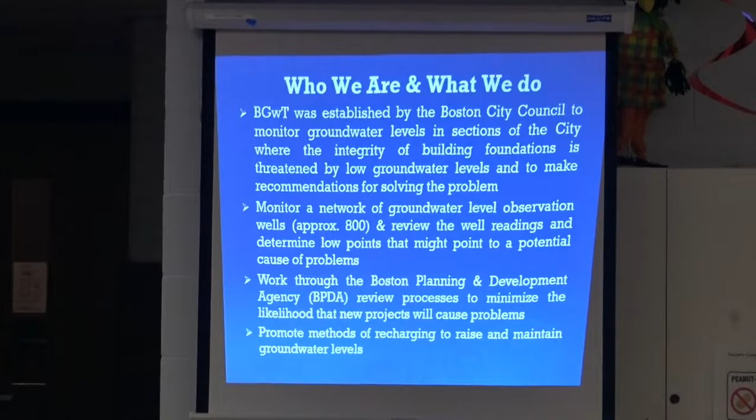So what do we do? Well, we were established by the Boston City Council in 1986. And our main purpose is to monitor groundwater levels in the city where there are wood piling supported buildings, and make sure that the groundwater levels remain above the tops of those pilings. If the groundwater levels drop, the pilings become exposed to air, and it's a race against time to find out why they dropped and bring the levels back up. If they're down for an extended period of time, for years, they rot. I'll show you some pictures. The building starts to settle and eventually fail.

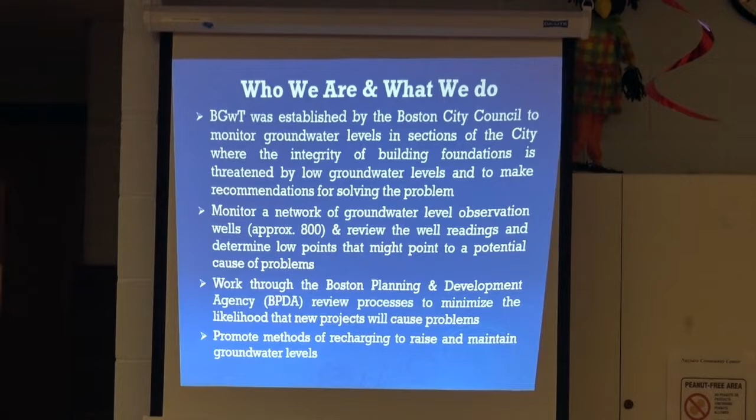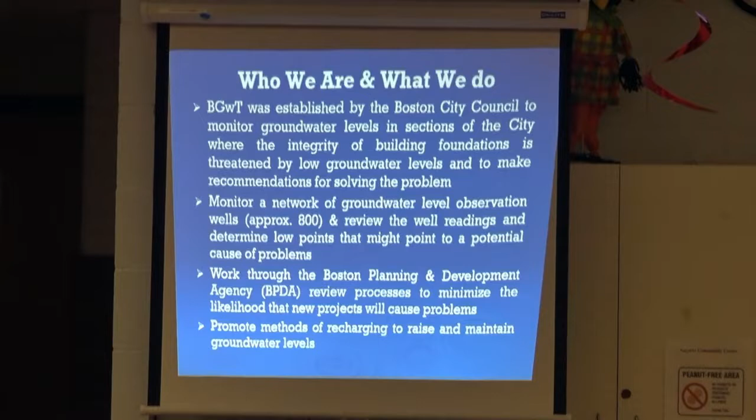We have a network of 800 observation wells throughout the city where we monitor the groundwater levels, and I'll show you a map exactly where all those are. We also work through the BPDA review process, so any Article 80 project, we have the opportunity to comment. When there's a scoping session, we sit on the city side of the table with the other agencies, provide comments to make sure that any new development is not going to negatively impact groundwater levels, and I'll review that quickly as well.

We also promote methods of recharging to raise and maintain groundwater levels, and I'll review that as well. Porous sidewalks, recharge systems, taking the roof leaders in the buildings, instead of having them spill out onto the sidewalk, put them back into the ground via a recharge system. That helps raise and maintain the groundwater.

So why we were established: these were the articles in the 1980s in the Boston Herald, maybe it was the Record American back then, the Boston Globe. The problem started in the flat of Beacon Hill. There was a faulty sewer. The problem was there was no groundwater trust monitoring groundwater levels. So all of a sudden, all these buildings started sinking and cracking, and nobody had any idea why. They hired some engineers, and they found out that the piles had rotted, the groundwater levels had dropped.

It took them a little while to figure out why the groundwater levels had dropped. But when they did, there was this gigantic lawsuit. People in Lower Beacon Hill went to the city and said, what are you doing for our buildings? Is there any program in place? The city said, no, we're not doing anything. They established the trust. So Boston's very unique in that a huge chunk of it, about 5,000 acres, is filled land. So this is the view from the State House in 1858, this is what Back Bay looked like, okay?

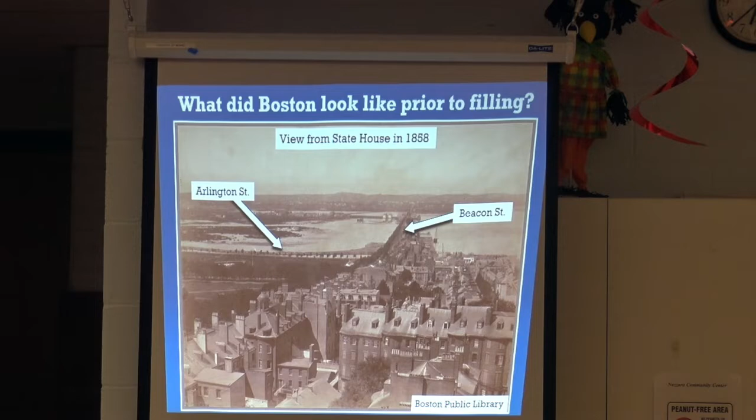It was just a bay. You had Arlington Street, Beacon Street. If you head west, Fenway Park at some point would have been there. But this is the South End, the Back Bay. Here is the North End. The majority of East Boston's all filled.

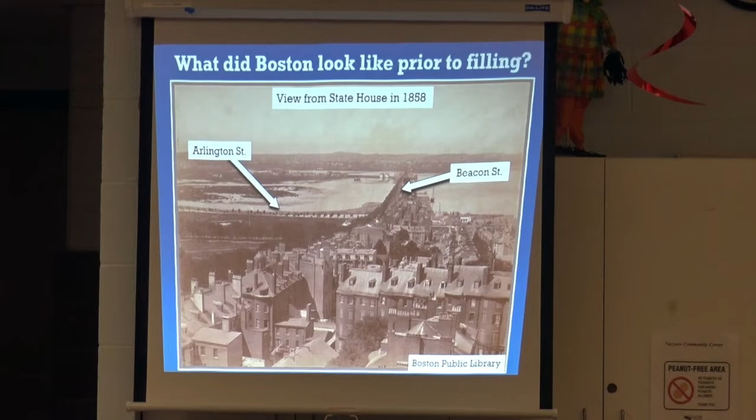I get a lot, oh, that's a Back Bay thing, that's a Beacon Hill thing. It's not. It's in many other areas, as I'll show you in here. So what did they do? They filled it in. It took a very long time. They filled in different areas. The Back Bay and the Fenway alone took 30 years just to fill in.

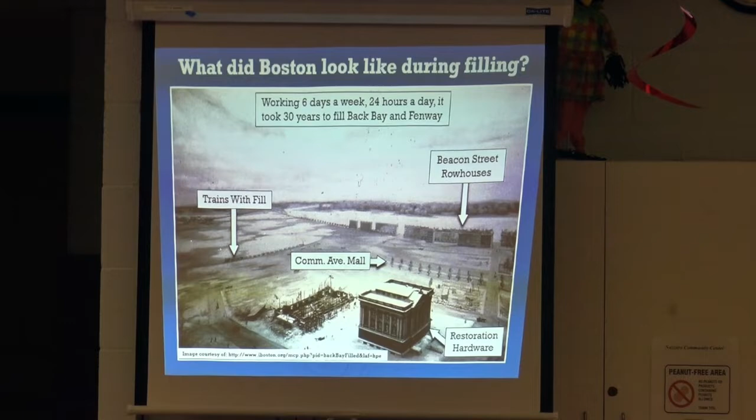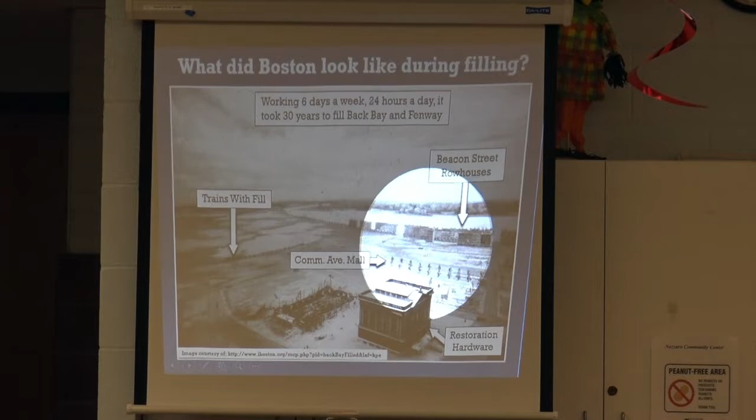And this building right here is actually the current building that's still there today. It's the Restoration Hardware in the Back Bay. This gives you an idea of what the scope was like in the scale. You start to see the formation of early row houses along Beacon Street and the start of the Commonwealth Avenue Mall.

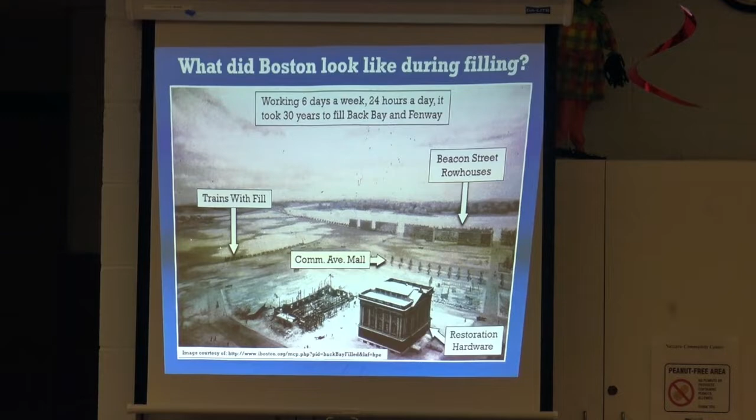Most of the fill they brought in from Needham by train. All they did was just dump it in. It was called unconsolidated fill, which means that it was just placed there. It's like taking a shovel of dirt and just tossing it. That's what they did. So today, this is what Boston looks like. The area in red is what we call original land. All the area that's in black and white is filled land.

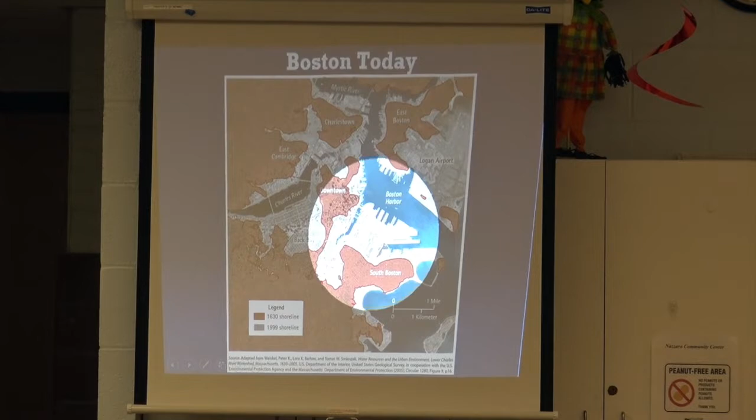In any of those areas that have brick buildings on them and were constructed between the mid-1800s and the early 1900s, most likely they're on piles because those are heavy buildings. That's why they had to use piles, because again, the fill was unconsolidated. It wasn't like you just put it on solid ground.

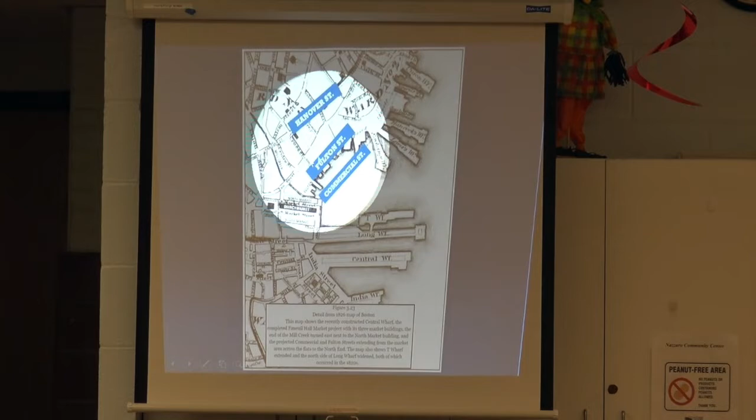So this is what the North End looked like in 1826. Here you can see where Commercial Street would be, Fulton Street, Hanover Street. Those streets exist, but Commercial Street was basically in the water. So any of these buildings around the fringe, and on the other side by the Bulfinch Triangle, once that land was filled in and they put up the brick buildings, they were supported on pilings.

Again, why wood piles? Land was made using unconsolidated fill, which couldn't support heavy structures, and it was really the best available technology until the mid-1920s when they started using concrete and steel.

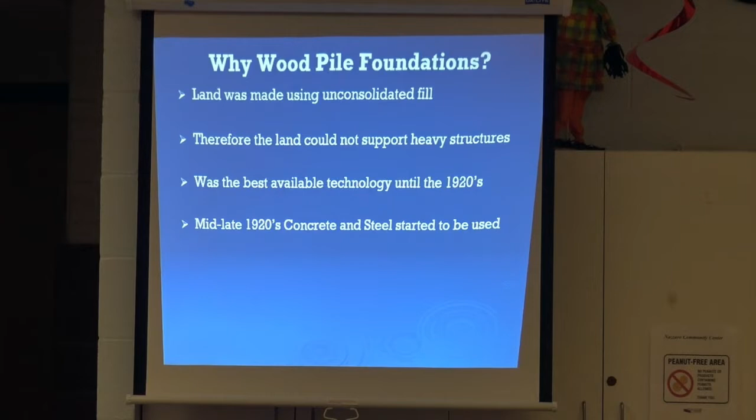Can you explain what unconsolidated fill is, or what consolidated fill is? Sure. Unconsolidated fill is basically, like I said, just taking a pile of dirt and dumping it somewhere. Consolidated fill is actually engineered and compressed to allow for a structure to be placed on it. Here, they just filled in the bed. It's almost like filling in a big pool.

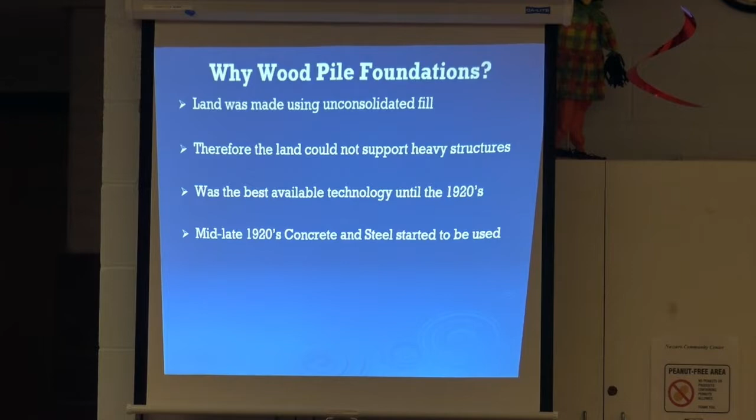What would they compress it with? Today they would compress it with machines. They'd have these huge drivers just go right over. You know how when they do a parking lot, you see a huge scraper come over? Yeah, it's kind of like pressure pack. To level. Pressure pack dirt, got it. Yeah, basically.

So how long can wood piles last? Indefinitely. There are cathedrals in Europe, where this technology came from, that can last 500-600 years, even more. It takes a while for the wood to rot. So we've got two things on our side. A lot of these structures, number one, were overbuilt: they didn't have computers back then to estimate the exact number of piles needed under a building. Pretty much every building supported on piles has almost double the piles it needs. That's a good thing.

The second thing is the process of rotting is very, very slow. It takes years for a pile to be exposed, air to get at it, microbes to start to eat away at the wood, and then for buildings to show signs of distress. In Beacon Hill, it was estimated that it took a good 6 to 7 years of permanently depressed groundwater levels, with piles exposed to air, for the buildings to start to show settlement.

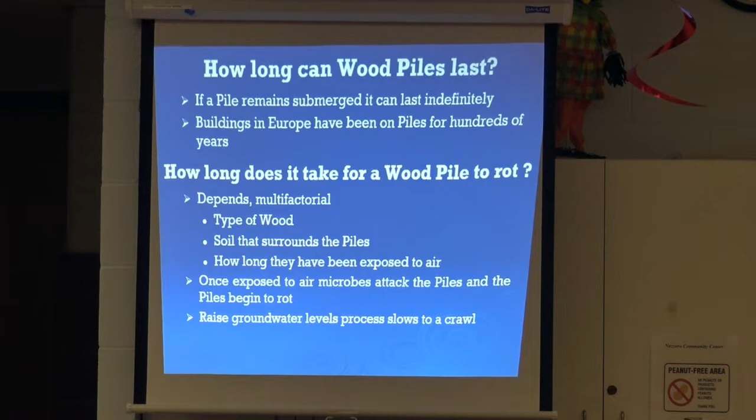The other thing is it's a race against time to find out why the groundwater levels are low. When we see that the groundwater levels are low, it's usually a leak, and it's usually got something to do with us. Something to do with a pipe, a basement, or somebody doing something they're not supposed to.

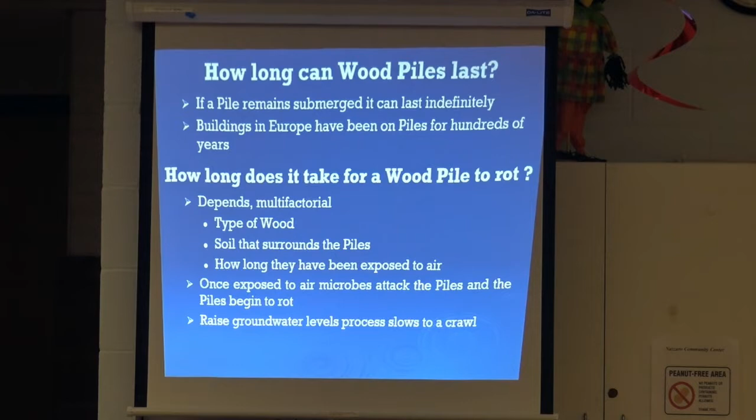If we fix that and you raise the groundwater levels, the process of rotting slows to a crawl. Because now what you did was you removed the oxygen that allows those microbes to feed. They basically just drown and die, and the process of rotting again slows to a crawl. So that's why we raise the groundwater levels. These are ideal conditions. This is what we strive for in every neighborhood.

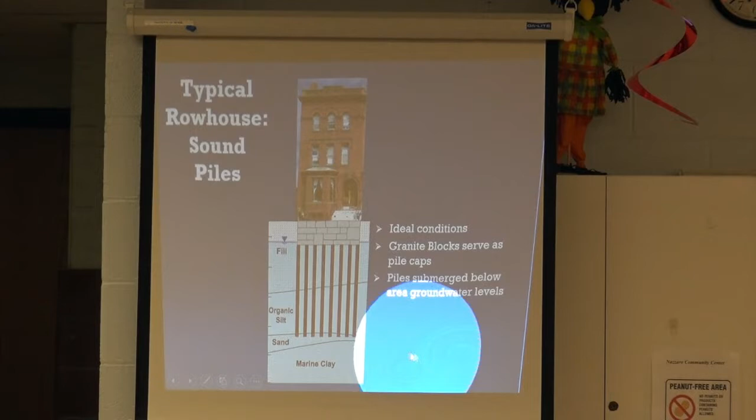Groundwater level is indicated by this upside down triangle into the ground, okay? It's above the tops of the pilings. These granite blocks actually are what support the structure that's set on top of the pilings, so that's where we want the groundwater level. Above the tops of the pilings, fully saturated.

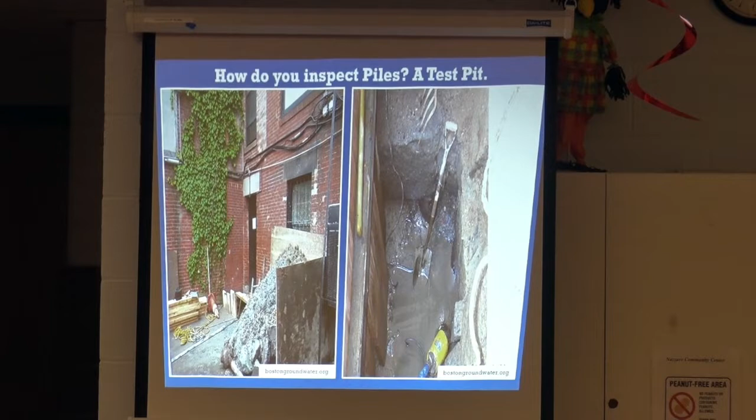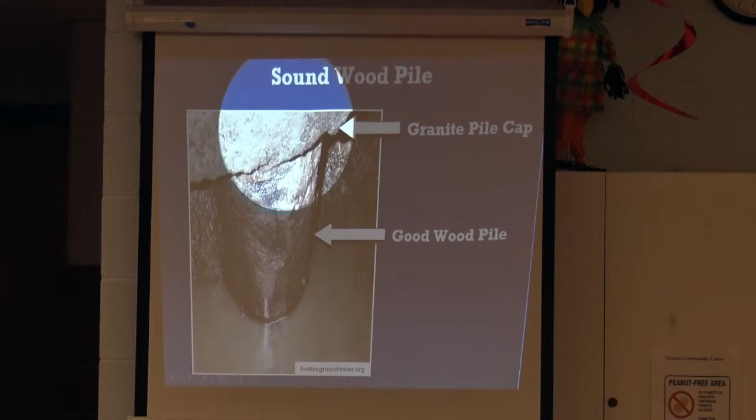In order to find out if a building is at risk, you gotta dig a hole. It's called a test pit. You go right down next to the foundation of a building, probably about a 10-foot wide hole or so. You go down another 15 feet and you expose the wood piles. This is what you hope to find. A nice wood pile, 10 to 12 inches in diameter, in good shape, in full contact with that granite pile cap. Piles are in good shape, no signs of settlement, everything's good.

Same thing here, this is actually under the Old South Church. These are wood piles under the Old South Church. They're in excellent shape. The groundwater table was lowered temporarily to take this picture, as it was in the other picture, but again, piles are in good shape. That's what we're looking for.

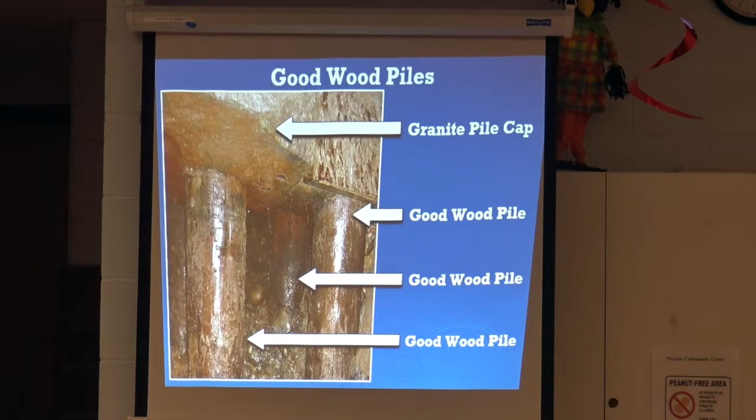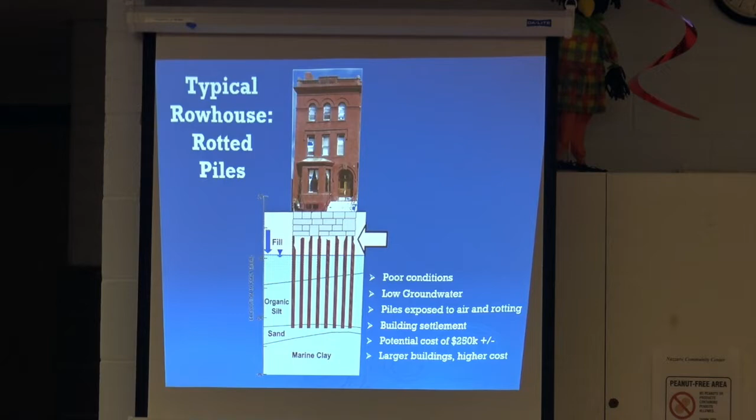What we're not looking for: depressed groundwater levels, okay? Groundwater table drops for whatever reason. Like I said, leaky pipe, an extended period of drought. When piles become exposed to air, they start rotting, the building starts to settle, okay? Potential cost to fix a building, to underpin a building, is anywhere from $250,000 or more.

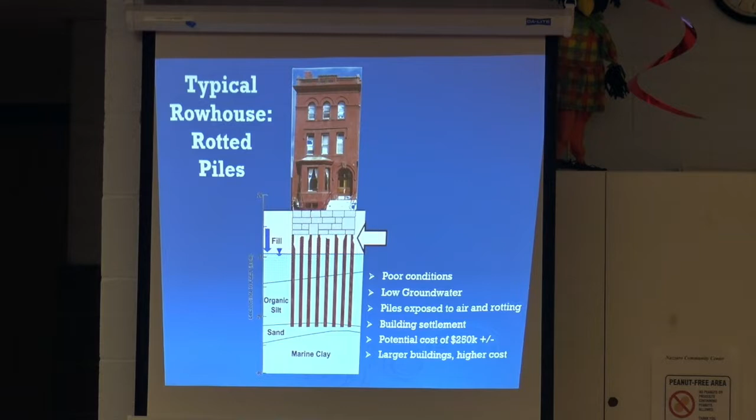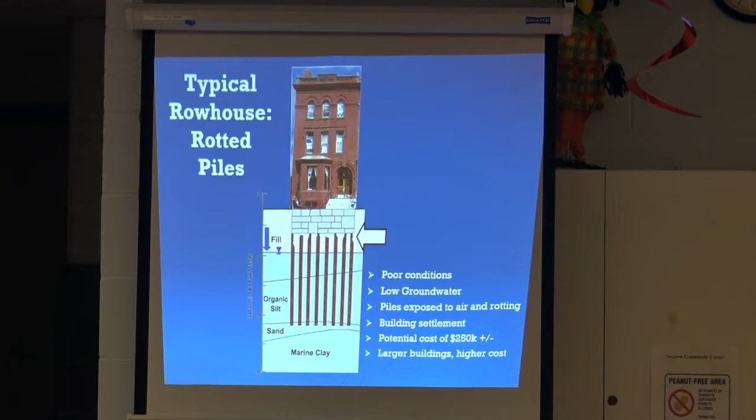There's a building here in the North End, I'm not gonna name it, we spent over $3 million to repair that building, okay? Wouldn't wanna live in that building. It was a huge special assessment, but again, this was before we really started to get up and running with our monitoring program and really weren't aware of the issue until they were basically in full mode to repair it.

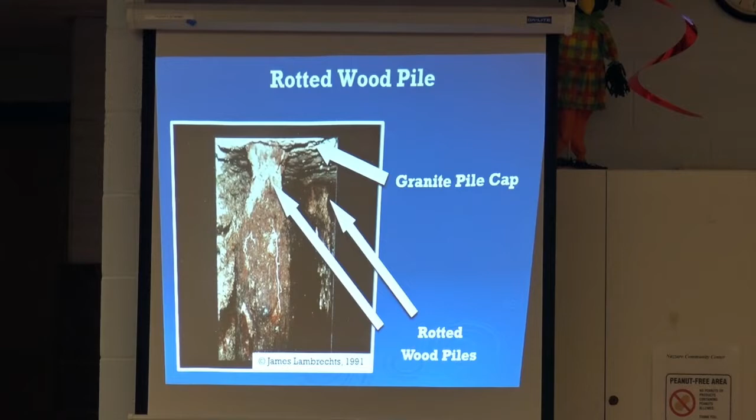These are what rotted wood piles look like, okay? This is from a building in Beacon Hill in the 80s where the groundwater table had dropped for an extended period of time. And it's almost like just taking an unsharpened pencil and putting it into a pencil sharpener. Over time, that top rots. And once that goes, that granite block that sits on top sinks. When that happens, the building above it starts to settle.

They also rot at different rates. Not every pile rots evenly. If they did, the whole building would settle evenly, but it doesn't. You have a constant push-pull, it's called differential settlement, where the building is stressing and straining on the way down.

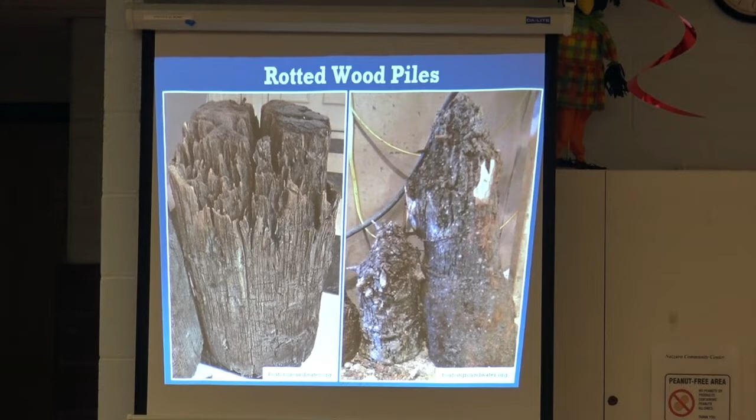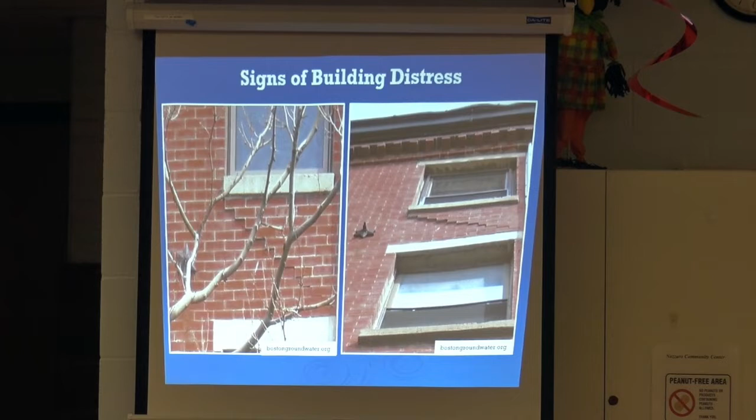What's the fix? It's called cut and cap. This is the underpinning fix. You have to dig down manually by hand, expose each one of these piles. You have to cut the piles off, typically 2 to 3 feet below where the existing groundwater level is. The engineer makes that determination. And you go through and you do it for each one.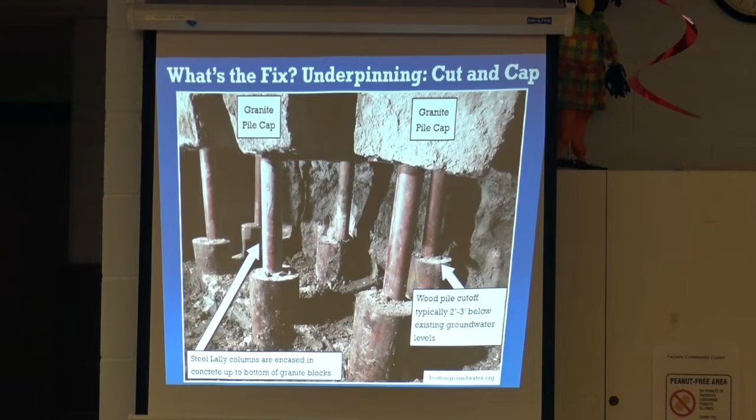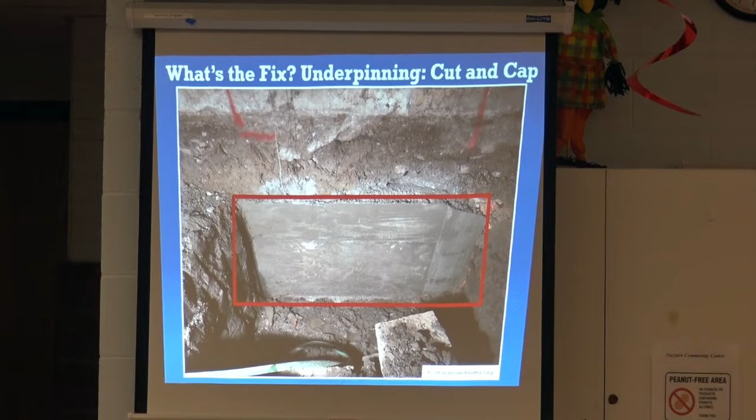You reestablish the connection of the rotted pile between the good part of the pile and the granite pile cap. That whole thing gets encased in concrete, but you do that for a certain section. So if a building has 200 to 300 piles underneath it, and you can do maybe 6 to 8 piles a week, it's a months-long process. That's where the expense comes in. The time, the manpower to do it. You can't get down there with a machine. You have to do everything by hand.

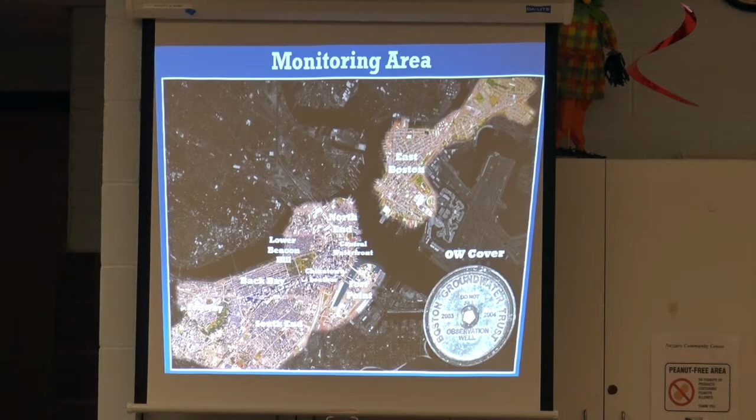And ultimately, that's what we're trying to avoid. This is our monitoring area, so I mentioned all the filled land areas of the city, okay? So you have the North End, Central Waterfront, Chinatown, Fort Point, South End, Fenway, Back Bay. And again, the majority of East Boston, really because of the airport, is filled, but we do have an area here in the flats in East Boston where there's a bunch of wood piling support structures right off of Maverick Square, essentially.

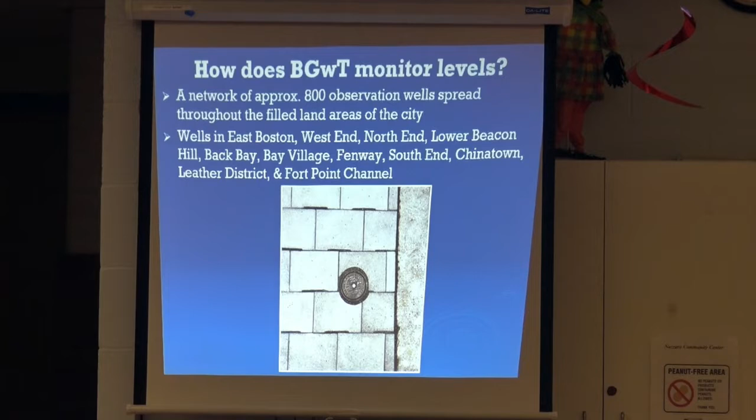How do we monitor groundwater levels? I mentioned the observation well. So there's 800 of these in the sidewalk. We have about 31 in the North End alone, spread throughout the affected area. We read all 800 wells about every 5 to 6 weeks. The engineers will go out, they'll read a certain area in a day, send the data in, we'll take a look at it. At the end, we generate a newsletter, which I'll be happy to include anybody on.

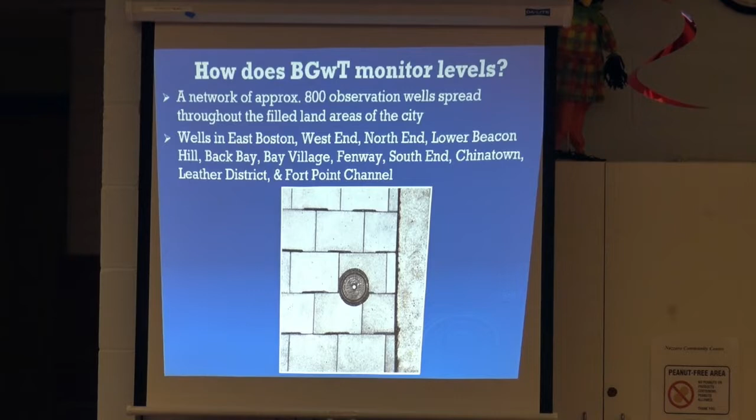I actually just sent one out Tuesday morning. That was yesterday, I don't know where this week's going.

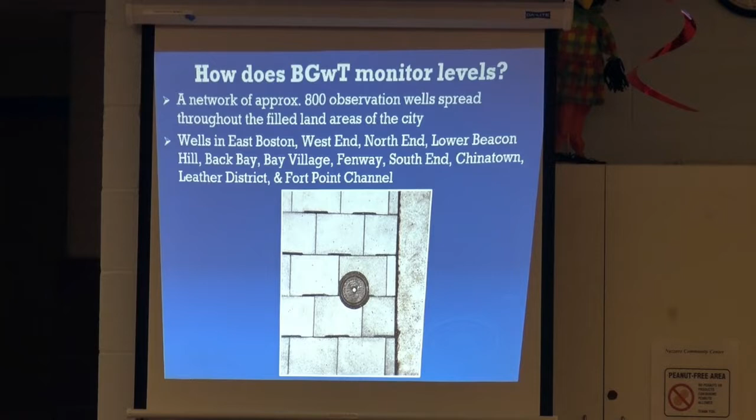That report usually gets generated every 5 to 6 weeks. Tell everybody what we're up to, what the groundwater levels are up to, where the hot spots are, all based on the groundwater level data. An observation well is just a PVC pipe in the ground that's perforated. It goes about 20 feet, 25 feet into the ground. This allows for the groundwater to percolate into the well.

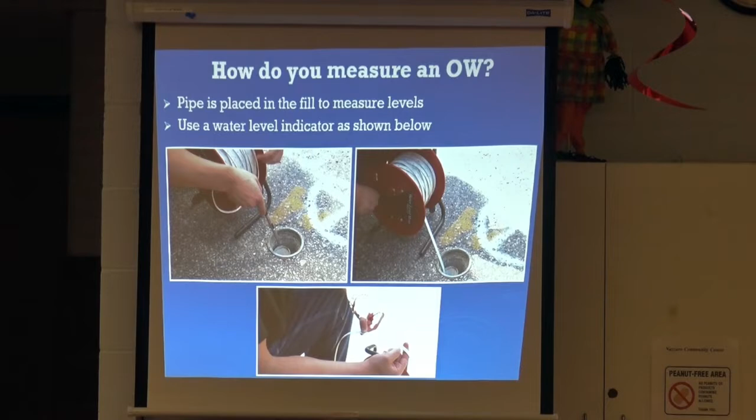Once we have the well in place, we secure it with a roadway box. We come up, we take a groundwater level measurement with a device that tells us the groundwater is 10 feet below the ground surface, 12 feet below the ground surface, and whether or not any buildings are at risk. So we use our groundwater level data combined with the data that we have for the cutoff elevations of the wood piles underneath the buildings and determine whether or not an area is at risk, whether or not buildings are at risk.

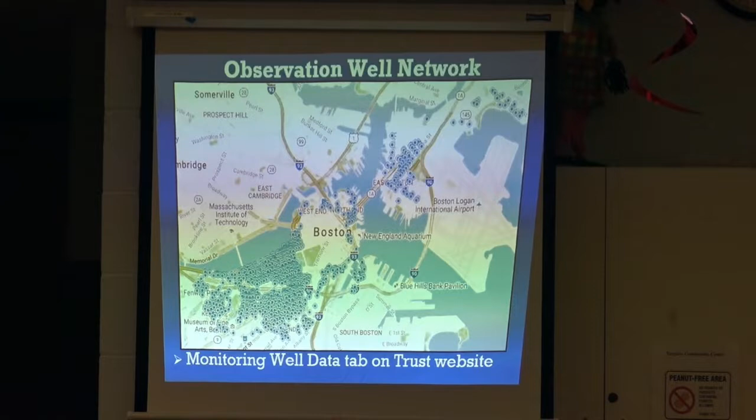So these are all our wells. On our website, our monitoring well data tab, each one of these little blue dots is an observation well. There's about 800 of them, spread throughout all the affected areas of the city. When you go on the website, all of the wells are in what we call Boston City Base datum. The water level data is in that datum because the wood pile cutoff elevation is in that datum. Boston City Base datum is basically mean low water, mean low tide.

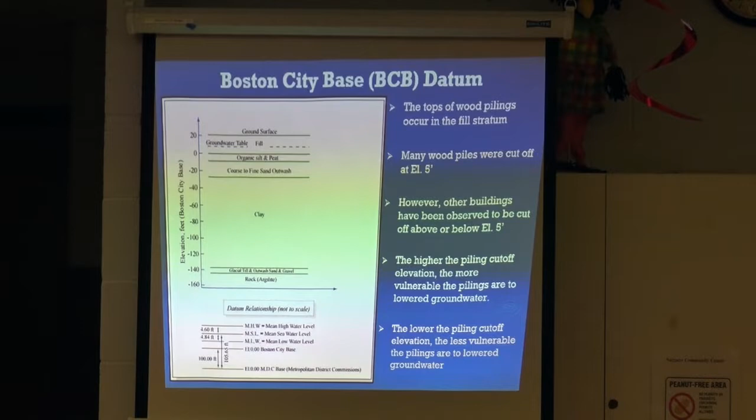We're good. If the groundwater level is at 4 and the pilings are at elevation 5, that means we're not good, because now we have a foot of piling that's exposed to air. We have to figure out why. We have to look at the infrastructure, the utilities in the area. I'll talk about how we work with the local entities who have that infrastructure and how we partner with them.

Everybody asks, why do you have 800 wells? Why do you have so many wells? All of these buildings were constructed at different times. As a result, we have different buildings with different piling cutoff heights. So what's good in one area for groundwater levels may not be good in another area. East Boston has an extraordinary number of high well elevations. Most of the wells are in the 7 to 8 category, solid wood piles.

Whereas in the North End, South End, Fenway, Back Bay, most of those piles were cut off at elevation 5. The buildings were constructed later, and at the time, we didn't have buildings with deep basements. We didn't have all these sewers. We didn't have all these tunnels. When we put all that stuff in, it created different spots and paths for groundwater to get into if it broke. So that's what would draw the groundwater into it.

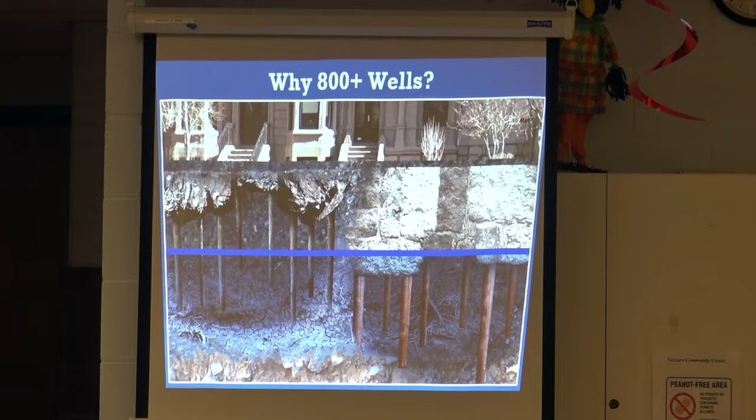Because there's so much underground too. I mean, you have so many utilities, you have so many tunnels. In order for us to get a clear picture of where the problem is and where the groundwater levels are, we need that many wells.

We've researched every building that's in the filled land area of the city over the past 12 years. We've gone to inspectional services, we've gone on their website, we've gone to the library. Any building that had an original building permit, any building that had the information that we were looking for, we put up on our website. And it's broken down by neighborhood, okay? North End's up there as well, Back Bay, South End, they're all up there. Whatever we can find is up.

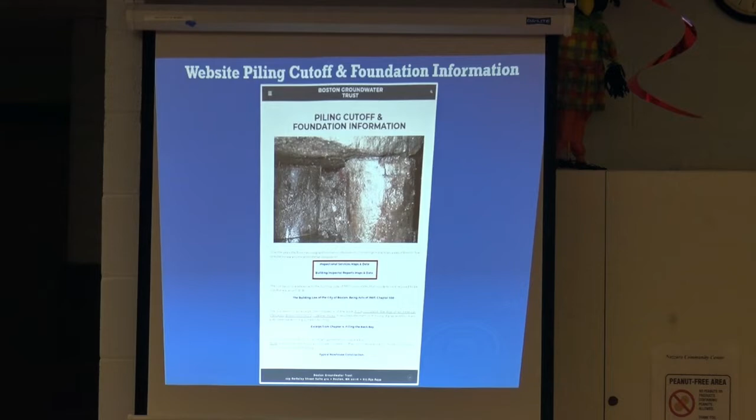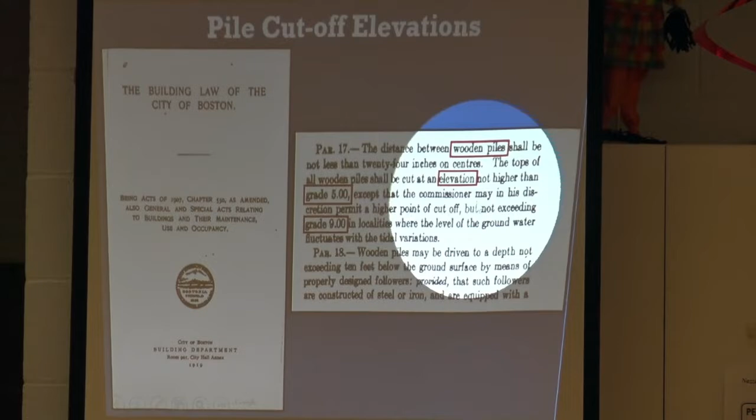The reason that's important is because we need to know where these buildings, the pile cutoffs are in relation to our groundwater levels and whether or not we need to look at the area. I mentioned the variability of the pile cutoff elevations. This was the building code in the 1900s, and you'll notice there's a huge variability here, okay? Where the wood piles shall be driven 24 inches on center, and the top should be cut at an elevation not higher than grade 5, that's BCB, except that the commissioner may in his discretion permit a higher point but not exceeding that. That's a 4-foot variable. Okay, that's what we're dealing with.

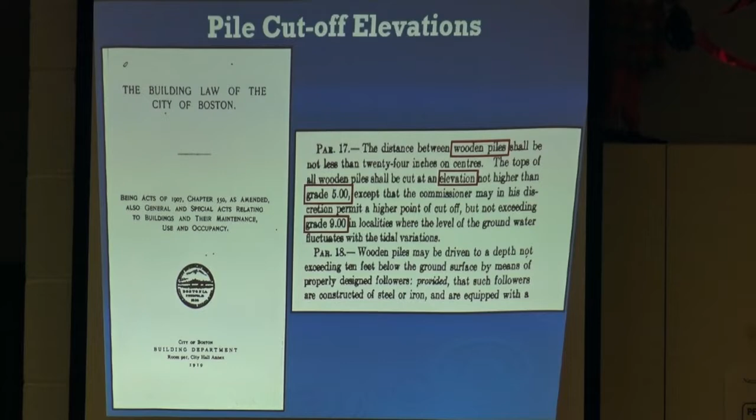So, I mentioned the buildings cut off at 8 and 9. The commissioner looked at the groundwater table and it was at 9. All right, fine, cut the piles off at 8. You know, you don't need to cut them off lower, they're fine, the water level's fine. Fast forward all these years later, not fine.

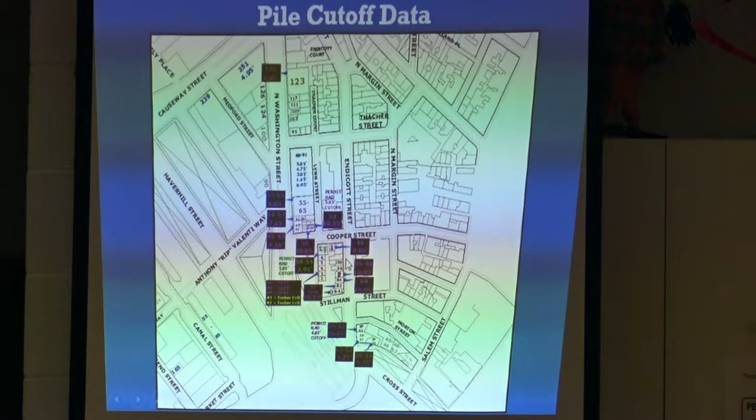This is the pile cutoff data that we have for the North End. So now we're on the other side going over towards the Garden. And you can see a number of buildings here that have high pile cutoff elevations along Thacher, okay, along North Washington, Stillman Street here, Endicott as well. Piles were cut off pretty high. Good news is we have wells over there. The water elevations are also very high, so that's really good.

Unfortunately, when they were doing the artery, there were some buildings over here that were compromised. They didn't have a proper mitigation plan in place when they were doing the tunnel work. So some buildings over there did see pile settlement, building settlement, and ultimately they were repaired. They had to be repaired to do that work. We're in place now, so something like that wouldn't happen.

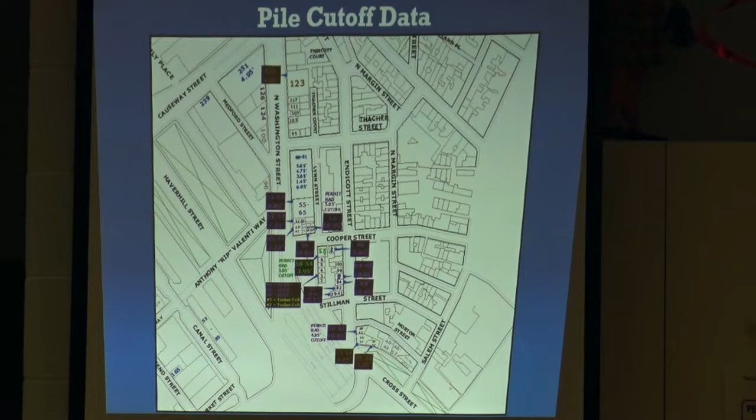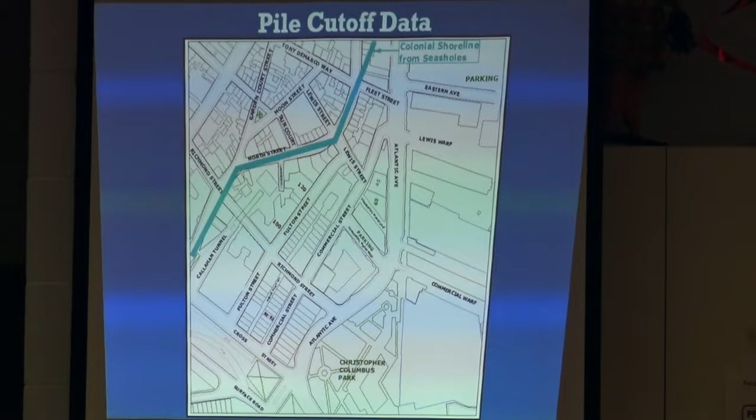Pile cutoff data here again is very scarce for Commercial Street, Fulton Street. Any of the addresses that are blank we searched, we couldn't find any information. Any of the buildings here that are in red are buildings that we found information for that the piles were indeed repaired. So at one point in time, before we started doing all our work, somebody went in there, fixed the piles because of depressed groundwater levels. Again, all of that's on our website.

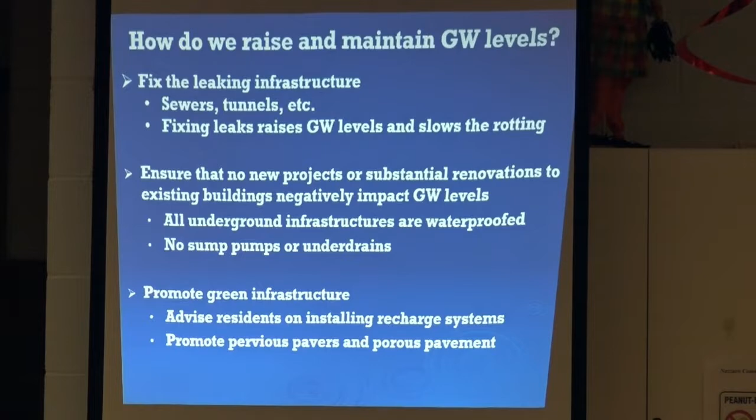So I mentioned monitoring levels, how do we fix the leaks, how do we address the issues. You look at the sewers, you look at the tunnels, if any of that is breached, if any of that is not working the way it should, if it's not sealed properly, they fix it.

Also, any new project, anything that comes in, Article 80, anybody that comes in says, I want to put in this big building here with 2 to 3 levels of underground parking, they need to certify to us as part of the approval process that the building will be watertight. Okay, any elevator pit that gets put in will have no sump pumps, that'll be completely waterproof. Same thing with underground garage, it'll be completely waterproof.

It will not allow for the intrusion of groundwater, okay? It'll be its own separate, essentially, bathtub, it'll be dry. No sump pumps, no under drains, okay? A lot of the buildings that will be constructed in any other part of the country, that will be the way to keep the groundwater out of the building. Here, that doesn't fly.

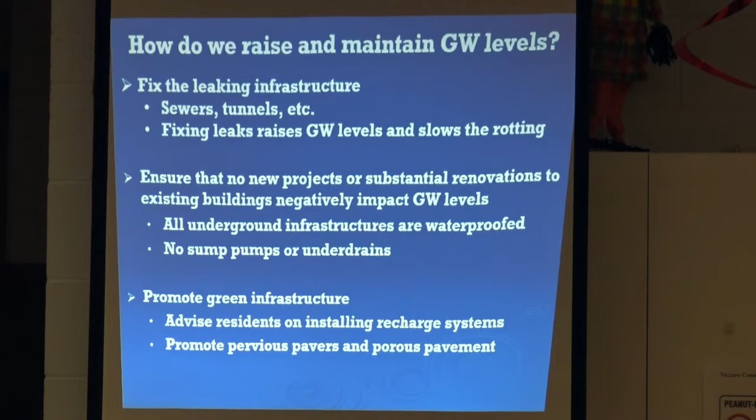We promote green infrastructure, as I mentioned. We advise residents on installing recharge systems, promote pervious pavers and pavement. We're more than happy to talk about that. That's a whole other presentation in itself. The GCOD, this is Article 32 zoning that was implemented in 2005. So basically, anybody that comes in and hits any of these triggers, if they substantially rehabilitate a building, which is defined by 50% of the assessed value of the building.

If they dig down below elevation 7, if they build out a big structure, anything greater than 50 square feet, if they pave or resurface an area, they're required to put in a recharge system, which means that when you go to ISD for your building permit and you hit any one of these triggers, you get your turn down letter. Cited for Article 32, the applicant has to go to Water and Sewer, get a system that's approved for recharge, again, just taking the roof leaders and putting it back into the ground instead of out into the street or into their system.

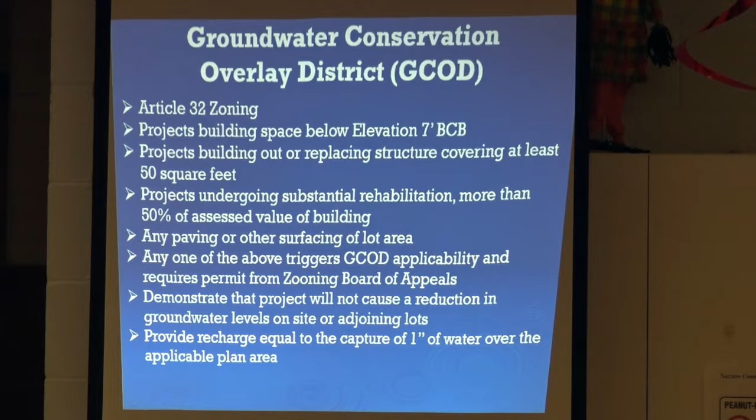Part of my proposal to the BPDA and Commissioner Christopher's office at ISD is to modify the zoning to have you get recharge per the zoning, to expand some of the areas and shrink some of the areas. The zoning was written, again, 12 years ago. We've learned a lot since then about groundwater levels and pile cutoffs. And at the time when this was written, we didn't have any information at the Bulfinch and North End yet on water levels of wood piles. So at the time, they just said, okay, just make that the no harm area, that way you can always come back and change it. It's certainly time to change it.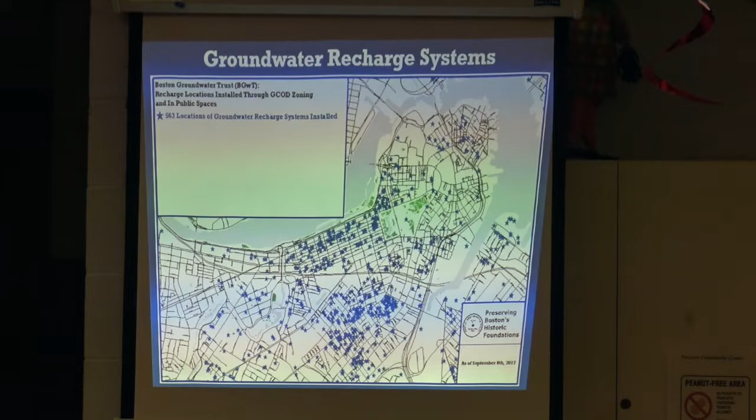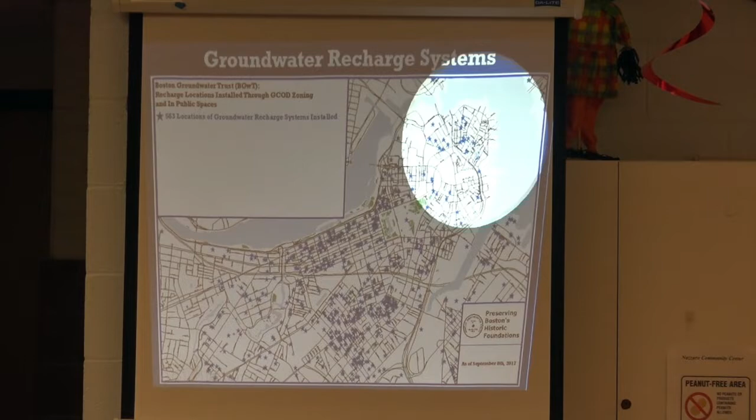As I did mention, the city's required. Water and Sewer's making everybody do it. You'll start to see a bunch, obviously, with all the buildings over here in the Bulfinch, but anybody that substantially rehabilitated their buildings over here had to put in recharge systems because they went to Water and Sewer.

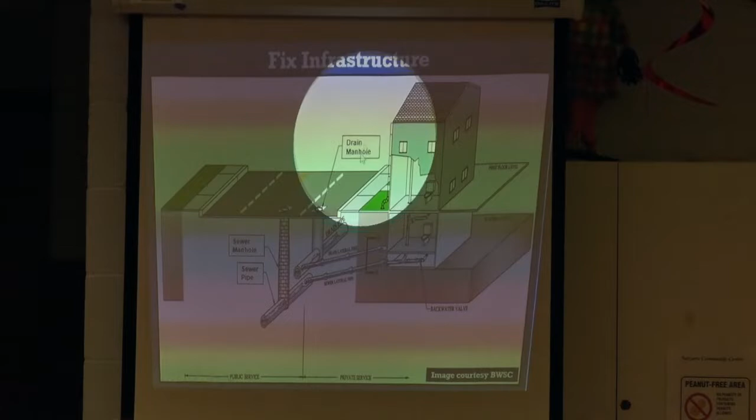So I mentioned fixing infrastructure. You got all this stuff underground, okay? Sewer pipes, manholes, drain lines. It's like owning a home. Something's going to break eventually, okay? And when it does, usually you get a breach and the groundwater levels drop.

So we had an issue with the corner of Fairfield and Beacon Street. In the summer of 2016, we had the driest summer we ever had. We had just under 4 inches of rain over 4 months. Got a lot of rain that fall. Groundwater levels came up except for a corner. And we said, all right, this is odd. Why is everything else coming up and this isn't?

So we put an automated logger, which is just basically suspended in a well, and it takes a reading every hour, okay? It's just an instrument that sits in the well and provides us a reading. And what it showed us is that when we had a significant amount of rain, the groundwater level spiked immediately and then dropped right back down. Telltale sign that there's a pipe leaking somewhere, that there's a problem.

So we worked with Water and Sewer and said, hey, what do you have for sewers over there? And they said, we got some pretty big sewers, we'll go take a look. The elevation of the water here was roughly at elevation 3, okay? Water and Sewer went out, looked at their pipe and said, oh, we got a huge leak. I said, where is it? It's at elevation 3. They fixed the pipe, and what happened? In less than 24 hours, the water levels came up 2 feet. Groundwater levels move in inches, not feet.

This just highlights how important it is to monitor the groundwater levels and how important it is to identify the leaks and make the fix. Because once you make the fix, for the next period of several weeks, the groundwater levels came up, they stayed up. The water levels in this area now, at about a dozen wells, are the highest they've ever been in over 15 years.

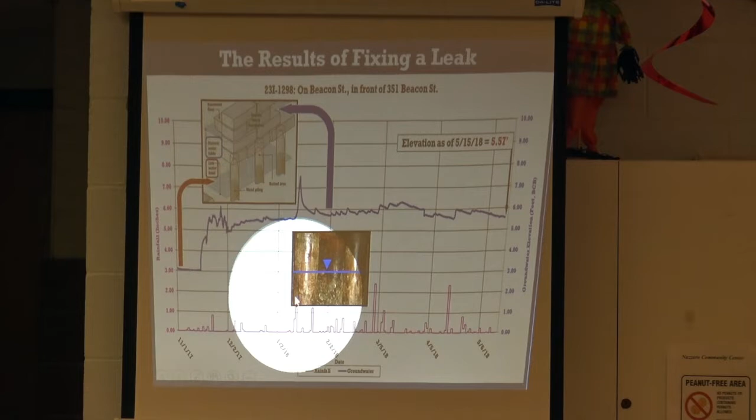I mentioned the pile cutoffs before, so this is what it was like before. This is where the groundwater was, exposing the piles. Here at elevation 3, when they made the fix, it came up. Now the water level is well above the tops of the pilings. Buildings haven't shown any signs of distress in that area. We're in good shape.

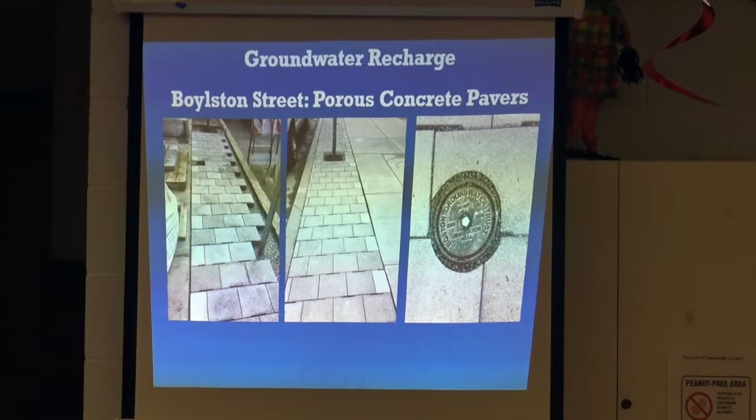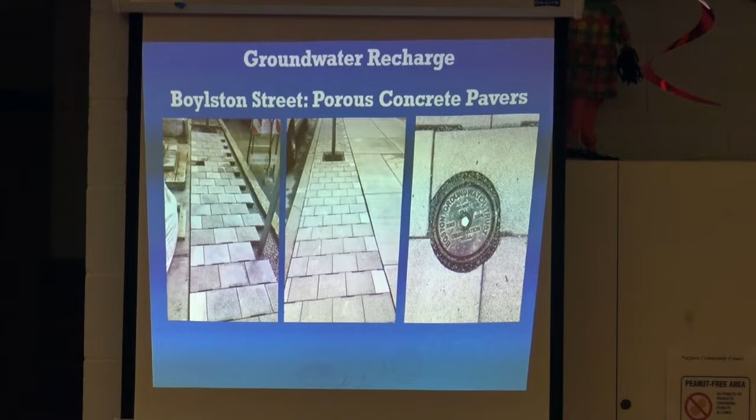Porous pavers, I mentioned, this is another way to get water into the ground instead of recharge systems. This is along Boylston Street, across the street from the public library. You're going to start to see more of these. We work with Public Works to implement these throughout the city, not just there, but actually the bike lane over on Commercial Street is porous pavement. We're going to start to see more of that too. We're going to be able to capture that water that's coming off the sidewalk, and instead of going into the sewers and the drains, it goes into the ground.

East Boston Central Square, that whole area that was redone is all porous materials, okay? Pervious concrete, pervious pavement, pervious pavers, all different types. So there's a ton of different ways you can do this. There's a ton of different ways you can make it look good. There's a ton of different ways you can make it look ugly too. But usually it looks pretty good, but you have to maintain it, okay? The cost to install it versus conventional asphalt is double, okay? That's why it's been slow to be implemented.

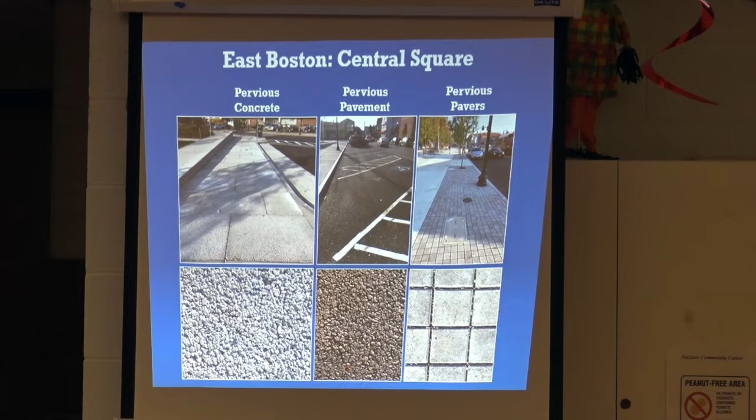But with the work that we do, not only with ISD, but also through the city's Environment, Energy, and Open Space, Chief Cook is on our board, he's a trustee, we're funded by them. By the way, that's where we get our money. We're contracted by them to do the work. We've worked with them to implement more of these throughout the city. You'll start to see more of these. It's not only good for us to get groundwater, it's good for them. It reduces pollution. It reduces the heat island effect. It's a win-win for everybody. Over time, people will become much more receptive to it, and we'll start to see more of these.

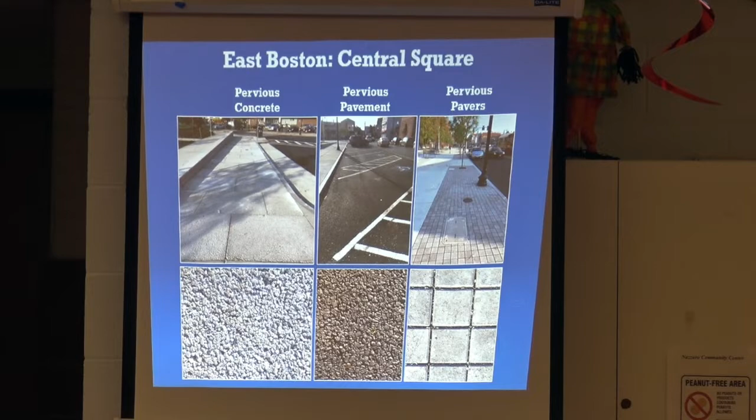Public awareness. So we actually have groundwater observation well covers that the public can interact with. It's called Project Lightwell, where you can download an app on your phone. This is for the real techie, geeky. I mean, even for me, it's a lot, to get groundwater levels. But people do interact with it. We actually had pretty good participation this summer when we installed them.

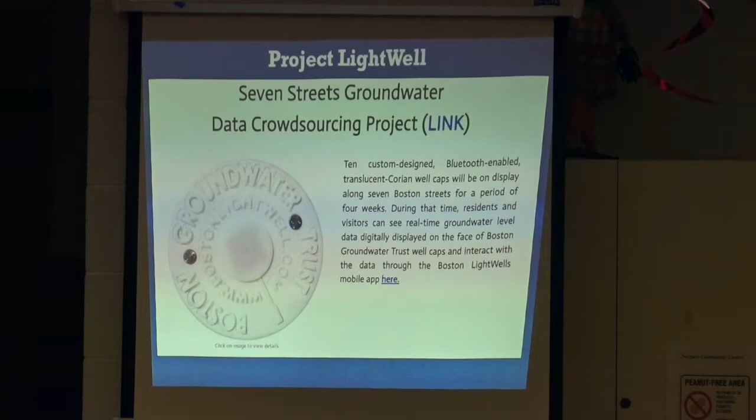And next summer, we're going to install them in the South End, and then they're going to make their way over here to the North End as well. I'll be working with Maria to get out a press release on that when we do come over here, so people know that they're there. They're different than the conventional cast iron. They're illuminated. You'll be able to use your phone and see the groundwater level data. It's just a way, again, to get people engaged and interacting and aware of the issue.

All right, what's at risk? Bottom line, this is a dollars issue, okay? Since 2012, property values have jumped 97%. Okay, you see the values of these buildings. This is just a block of the assessed values of the buildings in an affected area, okay?

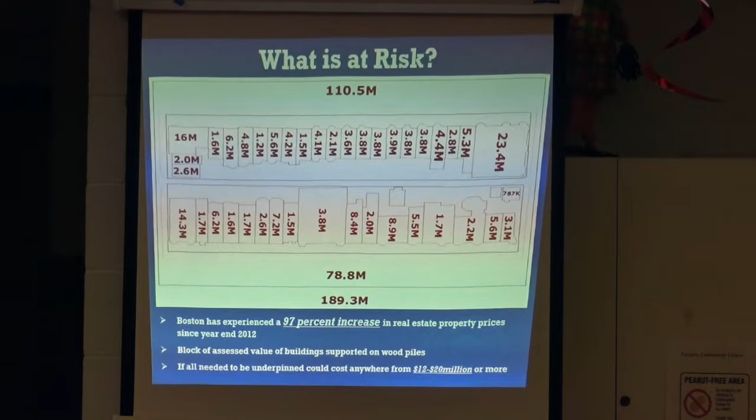If you had all these buildings that are worth all this money that had rotted piles because we weren't monitoring groundwater levels and we didn't exist, and that problem with Beacon and Fairfield was just allowed to fester over time, you'd be putting all those buildings at risk, and you'd be talking about anywhere from $12 to $20 million to fix all the buildings. That's that one square block. Now multiply that by all the blocks in the city. That's what we're dealing with.

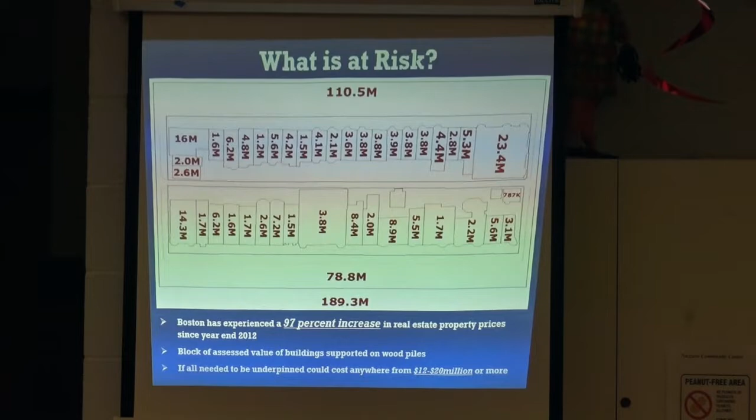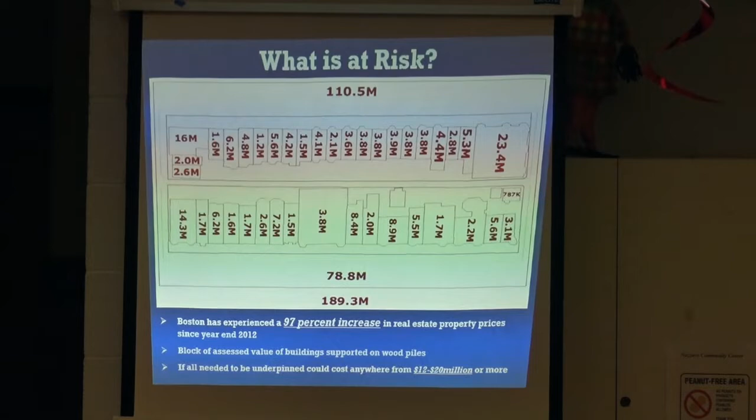That's why this is important to the city. That's why this is important to the residents. That's why it's important to us to prevent this. The problem with Beacon Hill occurred because there wasn't us. We weren't there. There was nobody looking. We're looking. The progress has been made.

So we're funded annually by the city. I mentioned the city's Environment, Energy, and Open Space. We're contracted by them to do the work. We've built out the well network. We go in every year and we replace wells that are old, wells that have been destroyed, about 10 to 12 wells a year. When I first started, we had about 150 wells. We ended up getting money to install the network of wells, and from 2003 to 2008, pretty much supervising installation of all the wells. So that's been completed, that's been built out.

The City State Groundwater Working Group, that's where we get together with BWSC, with MBTA, MWRA, all the entities that own all the stuff underground. We get up and we say, these are where the groundwater levels are, these are where they're low, what do you have for infrastructure that potentially could be compromised? They'll go, they'll take a look. If it's broke, they fix it just like water is.

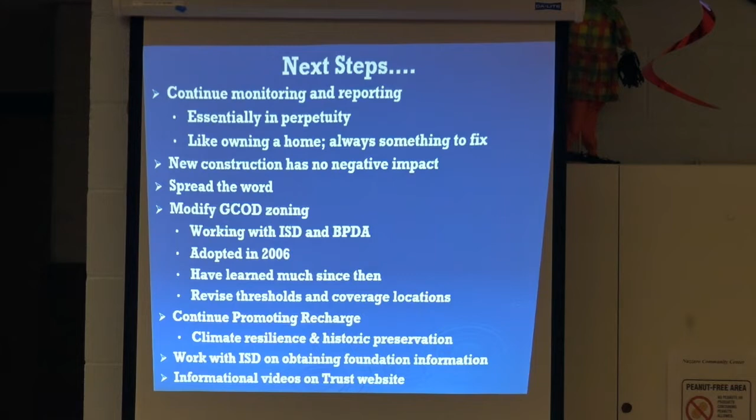Again, I mentioned the informational videos on the website. I really just flew through this. The 3 videos, in total, are about 11 minutes long. If you watch the first one, the second one, and the third one, to show the repair of the buildings, it'll go a long way into explaining a lot of this, and you'll probably even come up with some more questions after viewing that. I hope you don't, but if you do, let me know. I'll certainly be happy to answer any of those.

Any questions at all? Thank you for having me. I feel like I just breezed through that. Yeah, everybody was so quiet. Just figured I'd keep going. Fascinating. Learned quite a bit.

I'm just curious, how tall are the pilings, and how deep into the ground are they typically?

Typically, a pile could be 25 to 35 feet in length, and they'll be driven to what we call the soil bearing stratum. So it'll go through that unconsolidated fill that was dumped, and it'll go down essentially to the clay layer. So they're friction piles. So as soon as they were driven and they hit the surface where they met resistance, they stopped driving the pile. So it's based on really what the elevation of the fill is.

Right. Most of the piles I've seen, again, are in that length. East Boston, there wasn't that much fill, so those piles are shorter. They're maybe 10 to 15 feet, so they're not that long. But typically, 20 feet or more is usually what it is. And all a pile is, is just a tree trunk with the branches cut off, driven upside down into the ground. That's what it is. So they're tapered. So they're about 10 to 12 inches at the top, and they taper to like 6 or 7 inches at the bottom.

And so are they typically, just spitballing here, 10 feet of water and 10 feet of dirt, roughly, or 12 and 13, or what's an average? It depends on where you are. If standing at the ground surface, typically we like to see groundwater about 10 feet below the surface, because that's usually where the pile is. So you could have a piling that has 5 feet of water above it, 10 feet of water above it. It really depends on where you are in the city and how high and how low you are.